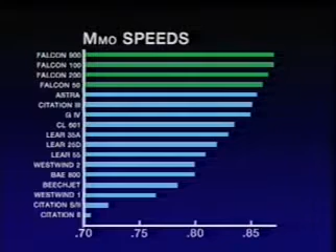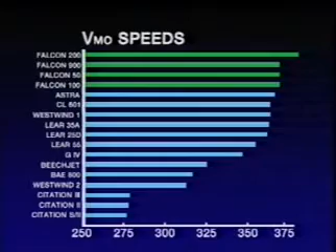This usually becomes limiting between 18 and 20,000 feet. The indicated airspeed limitation is expressed as VMO, velocity maximum operating. VMO is primarily a structural limitation. MMO is primarily an aerodynamic limitation.

To better understand Mach number, just imagine a sudden pressure disturbance in the atmosphere—a thunderclap, a gunshot, or a fast-moving aircraft. This pressure disturbance is transmitted by the collision of air molecules one against the other. The speed at which these molecular collisions propagate is the speed of sound.

Mach 1, or 100% of the speed of sound at sea level on a standard day, is 760 miles per hour, or about 660 knots true airspeed. Since the speed of sound decreases with temperature, it is lower at cruising altitudes than at sea level. Corporate jets typically fly at 50 to 80% of the speed of sound.

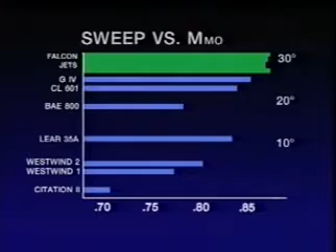An airplane's ability to cruise safely and efficiently at a given Mach number is largely a function of its wing design. Wing shape and the degree of wing sweep determine the most economical cruise Mach number. Given more sweep, a wing can provide even higher economical cruise speeds, although there is some penalty in range and runway requirements. Dassault has overcome the problem of increasing cruise speeds and Mach numbers without increasing wing sweep.

Instead, the computer-designed wing of the Falcon 100, for example, is optimized for high speed by reshaping to modify the wing's pressure pattern. This is similar to NASA's supercritical wing.

Computer-designed high-speed wings are relatively thick, which allows the installation of high-lift devices. They also have greater strength with lighter structure, while allowing economical cruise speeds equal to or greater than earlier thin-wing competitive designs. And they provide more room for fuel, so that external tanks are not needed.

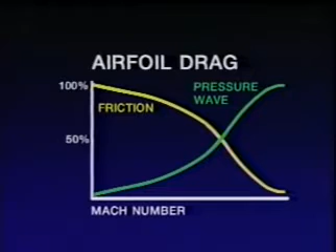At low Mach numbers, aerodynamic friction drag constitutes the major portion of airfoil drag. But as Mach number increases, a point is reached where the drag from the shock wave predominates. The reason for this is that as airspeed increases, the airflow accelerates until at some point the local Mach number on the wing's upper surface becomes sonic, or Mach 1. This is the wing's critical Mach number.

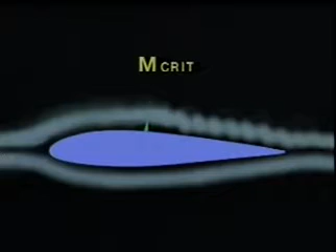If the critical Mach number is exceeded, an area of supersonic airflow is created, and a normal shock wave starts to form. With an increase in speed of only 5 to 10% beyond the critical Mach number, the shock wave is weak. However, a Mach number is reached eventually which produces a strong shock wave and a sharp increase in drag. This is called the drag divergence Mach number.

At this point, the shock wave is strong enough to alter the pressure distribution over the wing. This causes a decrease in lift and a change in the pitching moment as the wing's center of lift moves aft. The nose pitches down, causing speed to increase. This is the beginning of Mach tuck.

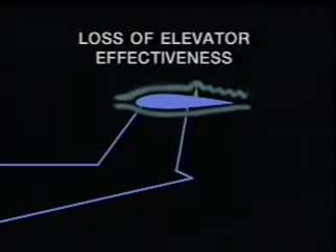Mach tuck involves two basic aerodynamic forces. First is the decreased effectiveness of the elevator caused by airflow separation due to shock wave formation. The second destabilizing force is the aft movement of the wing's center of lift as Mach number increases. This causes the aircraft to pitch down, increasing Mach number and aggravating the problem.

Left unchecked, the consequences are disastrous. When an aircraft exceeds its limiting Mach number, the turbulent wake behind the shock wave may cause a high-frequency buffeting in the flight control surfaces.

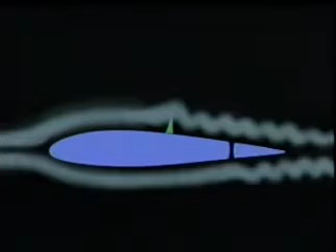With any type of reversible control system, the ailerons may bounce from stop to stop, a condition called aileron snatch. Prolonged or severe buffeting can result in structural damage or failure. In addition, separation of the boundary layer air by the shock wave results in decreased flight control effectiveness. In some instances, aileron control forces seem to reverse, and the elevator control force becomes extremely heavy.

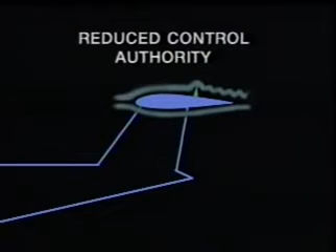So an accidental excursion over the limiting Mach number can result in control surface buzz, loss of normal control surface authority, and aggravated Mach tuck.

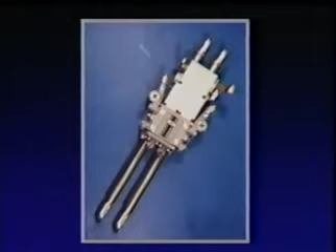In the Falcon jet family, these control problems are not noticed, thanks to an irreversible hydraulically actuated flight control system. The control surfaces are held rigid to prevent buzz or aerodynamic feedback to the pilot. The hazards of airflow separation are minimal in the Falcon jet family of business jets, with their swept wings, high-speed airfoil design, and hydraulically powered flight controls.

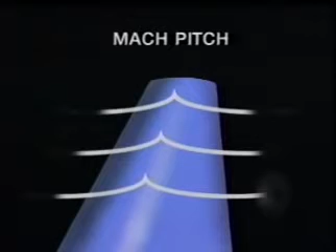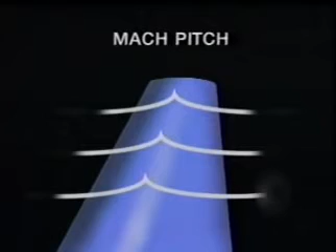Another phenomenon found in several types of corporate jets is Mach pitch. If the wing tips shock first, an aeroelastic twist rotates the tips and causes the center of pressure to move forward. In some aircraft, the wings shock unevenly, and a rolling moment is generated toward the wing that shocks first. A combination of these forces can result in Dutch roll, a rolling and yawing motion.

This can be corrected only by decelerating. Some aircraft require yaw dampers at higher altitudes. Dutch roll makes hand flying at high altitude extremely difficult in some aircraft.

By applying fighter technology, Falcon jets have none of these characteristics. They remain stable in pitch, yaw, and roll throughout their flight envelope. In fact, Falcons behave well not only to MMO, but 0.05 beyond. This is their MDF, or Mach demonstrated flight number.

An accidental Mach excursion can be caused by a change in aircraft attitude or a rapid change in atmospheric conditions. Increases of as much as 0.05 Mach have been known to occur in a matter of seconds. In many jets, this is a real emergency.

Above MMO, extension of spoilers often makes things worse. Reduction of speed may require landing gear extension and possible loss of the gear doors. Falcon pilots have more time to react to Mach excursions due to the extremely high MMO, higher than competitive aircraft. In addition, Falcon air brakes may be extended above MMO without destabilizing the aircraft.

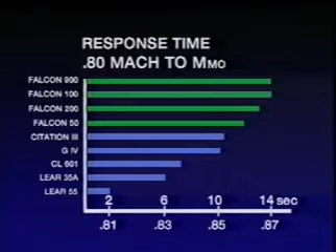What of the hazard called coffin corner? It's just not a problem in Falcon jets, but it can have serious consequences in several other types. Here's what happens. Every airfoil has an aerodynamic ceiling, where the high-speed and low-speed buffet boundaries merge. In that rarefied upper atmosphere, stall speed increases.

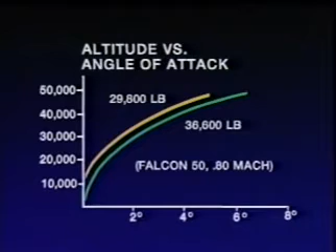This so-called low-speed buffet boundary is actually pre-stall buffet. It's caused by the combined effects of reduced air density and Reynolds number and the need to fly a higher angle of attack to maintain a target Mach number and altitude. In an effort to maintain a target Mach number of, let's say, 0.80, angle of attack must be increased, moving the stagnation point down the leading edge of the wing.

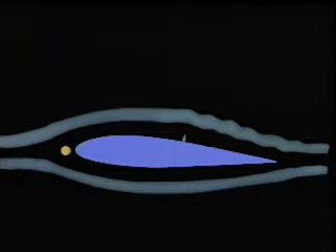Airflow over the top of the wing must accelerate as it has further to travel. The result is a higher local Mach number over the upper surface of the wing, generating a shock wave at a slower speed than at lower altitudes.

The onset of low-speed buffet is a direct function of aircraft gross weight, altitude, and temperature, coupled with bank angle and G-loading. The safety margin between low and high-speed buffet boundaries is best measured by indicated airspeed.

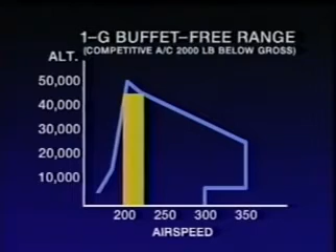For example, the 1G buffet-free range for a particular non-Falcon jet airplane at flight level 350 is from 187 knots indicated on the low-speed side to 279 knots on the high-speed side. At flight level 450, however, the buffet-free speed range is reduced by 77%, to 192 knots indicated on the low-speed side and 212 knots on the high-speed side, a spread of only 20 knots.

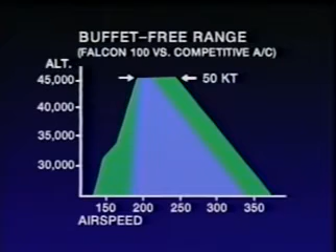This is not a problem in any of the Falcon jet aircraft. For example, the Falcon 100 still maintains a 50-knot spread between low-speed buffet and its .87 limiting Mach number at its maximum certified altitude of flight level 450.

The Falcon jet's exceptional high-altitude buffet-free envelope is superior to competitive models. We designed it that way. This means added safety during a clear air turbulence encounter or accidental thunderstorm penetration.

Now let's discuss turbulence penetration speeds. Aircraft manufacturers establish a turbulence penetration speed for each of their transport aircraft based on structural considerations. In competitive aircraft, this speed is often the same as maneuvering speed. At maneuvering speed, a sudden full-scale deflection of the elevator, rudder, or aileron will not result in structural damage or failure.

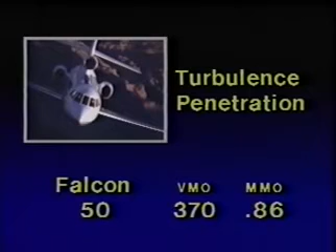The aircraft will stall rather than be overstressed by G-forces. In fact, under current certification standards, full rudder deflection at VMO must also be demonstrated. Falcon jet aircraft are so inherently strong that they are certified for flight through turbulence without speed restrictions. They can fly up to VMO or MMO as applicable. No other business jets have this capability.

The Falcon 100 has an established maneuvering speed of 220 knots indicated airspeed. At flight level 450, this is Mach .80. Competing designs are limited to Mach .73.

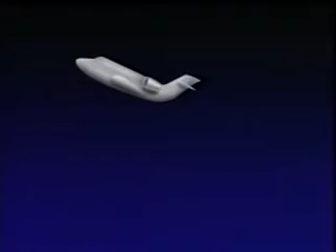At altitude, severe turbulence can quickly produce a gust-induced stall. In some T-tailed aircraft, this can lead to a locked-in deep stall. T-tailed aircraft with a locked-in deep stall problem are thus required to have an operational stick shaker and/or stick pusher system, which reduces this hazard. But a gust-induced stall is still possible.

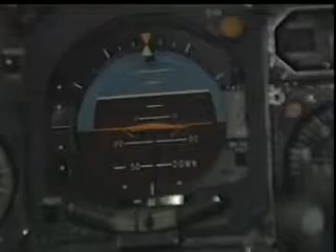With the autopilot on altitude hold, a sudden strong downdraft, mountain wave, or high-altitude wind shear can quickly place the aircraft below stick shaker airspeed, and control may be lost. Following a gust-induced stall, with the nose now lowered for recovery, suppose a strong updraft is encountered. The result will be a rapidly building airspeed and Mach number.

The instinctive pilot reaction is to trim and pull the nose up. But at high altitude, as little as half a G puts some aircraft into buffet, and the nose will not come up. Or, if the autopilot is flying the airplane, it will push the nose down in an effort to hold altitude. In either case, airspeed builds rapidly, and the limiting Mach number is quickly exceeded.

Without a Falcon-type irreversible servo control system, an accidental overspeed may expose the aircraft to the hazards of control surface buzz, aileron snatch, Mach tuck, and the loss of elevator control authority. Meanwhile, slowing down may put the aircraft into low-speed buffet. Such is the dilemma of Coffin Corner.

In the Falcon series, the irreversible hydraulic controls and aerodynamically advanced swept wings work together to eliminate these hazards. Some corporate accidents have occurred during dives at low altitude, where shock-induced flow separation is not a factor. In some instances, G limitations have been exceeded, and the tail or wing structure fails.

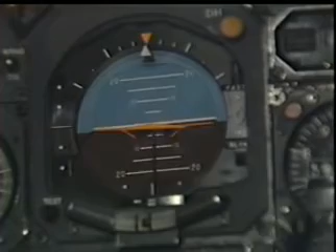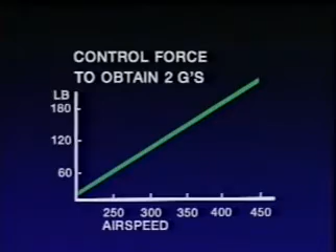In jets not equipped with servo controls, as indicated airspeed increases, the elevator control force required for dive recovery increases, and after the limiting airspeed is exceeded, the elevator may seem immovable. The hydraulically actuated flight controls used in the Falcon jet family of airplanes prevents this hazardous situation.

Because in a Falcon jet, as airspeed increases, the pilot continues to enjoy a comfortable elevator control force, while the mechanical advantage on the elevator becomes more restrictive to prevent sudden overstress by an overzealous control application.

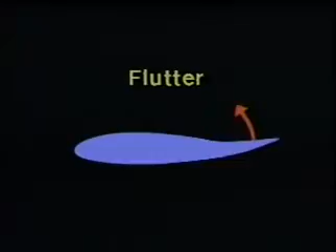Following a severe overspeed, evidence of aerodynamic flutter has been found in some jet upset accidents, but never in a Falcon. While any airfoil will flutter given enough airspeed, Falcons have been flown by test pilots in maximum speed dives to 445 knots indicated, or 75 knots faster than VMO, and studies show that flutter speed is far in excess of the dive speed.

Falcons are designed so that an accidental overspeed at high altitude will tend to be self-limiting due to shock-induced drag. Flutter speeds will not be reached. During a normal descent from cruise altitude, it is the same shock-wave-induced drag that caused Dassault to publish a fuel-efficient descent schedule of 0.8 Mach number intercepting 320 knots airspeed, avoiding excessive drag rise.

To make the Falcons even more comfortable and safe, Falcon engineered high-lift leading-edge devices and slotted Fowler flaps. These lower approach and landing speeds while retaining the docile flying qualities of a Falcon jet in cruise.

To increase the lift produced at low speeds, Dassault uses hydraulically operated full-span leading-edge slats. These slats change the wing's camber, producing greater lift at high angles of attack. The outboard slats improve airflow over the ailerons, improving low-speed handling. The inboard slats generate most of the lift by improving the airflow over the trailing edge flaps.

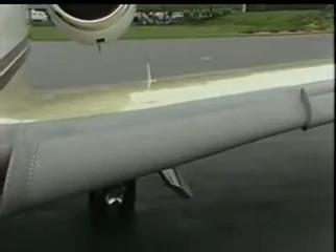The slats are extended and held rigidly in position by hydraulic actuators. Hydraulically operated slats have the advantage of remaining fixed in position during a landing approach in turbulent air. Aerodynamically operated slats on some aircraft can slide in and out in turbulence, constantly changing the coefficient of lift. When the slotted Fowler flaps extend, they increase the wing's chord as well as its camber, thus increasing the lift significantly in the first half of extension.

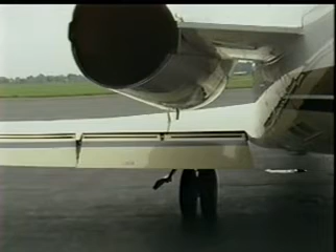When fully extended, high-lift devices lower the stall speed substantially and provide drag for a slow landing approach and touchdown. In fact, these high-lift devices are so effective that swept-wing Falcons routinely perform as well or better than straight-wing designs.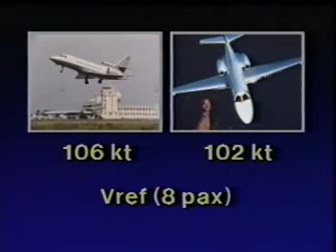For example, despite the fact that the Falcon 900 is approximately 3 times as heavy and nearly 100 knots faster than a Citation II, VREF with 8 passengers and NBAA IFR reserves is only 4 knots higher, and the runway it requires for a 1,500 nautical mile trip is actually less.

We've told you how well Falcons handle at high Mach numbers. Now we're going to show you by taking you into the cockpit of a Falcon 50 with Ed Allen of Falcon Jet Corporation and Hervé Le Prince Ringuet of Dassault. The demonstration you're about to see is unforgettable.

While this is not the recommended way to operate the aircraft, it provides dramatic evidence of the Falcon's superior capabilities in high Mach flight.

Today we would like to perform a high Mach demonstration for you. We're in our Falcon 50, but we could be in any Falcon, but not in just any business jet. This is due to the hydraulically powered flight controls, to the excellent aerodynamics of all the Dassault aircraft and all the Falcon aircraft. Hervé, could you block the airspace, please?

West control, Falcon Fox Bravo India November Romeo. Can you block an altitude for us between 430 and 310 heading to Sharp? Fox Bravo India November Romeo, descend for level 310, direct to Sharp. Thank you, direct to Sharp, down to 310.

The purpose of the high Mach demonstration is to show you that the Falcon 50 and all our other Falcons can fly at its limiting Mach and beyond without any problem.

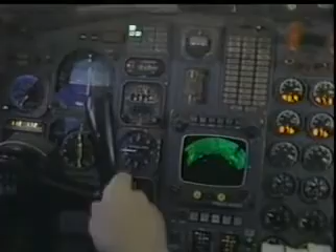So we'll go ahead and get started by first disconnecting the autopilot and the flight director and start a slight descent. The noise that you hear now is our trim clacker moving, which is a normal sound that you would hear in the cockpit.

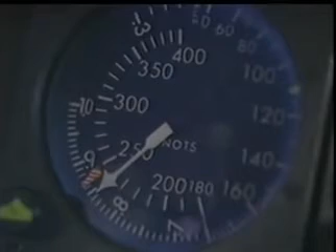Okay, our Mach has started to increase a little bit to Mach 0.83, 0.84, 0.85. There's our Mach warning limit at 0.865. We'll continue to accelerate. We're at Mach 0.90.

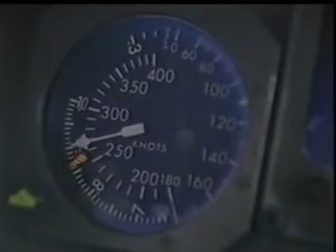And we still have no buzz, no vibration, and certainly no problem to fly the aircraft at this Mach. We can bank the aircraft left and right, 45 degrees of bank or more. You see there's still no tuck, there's no vibration to worry about whatsoever.

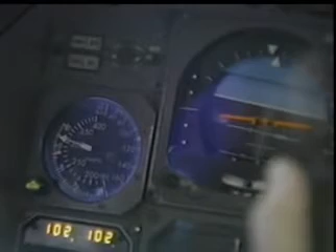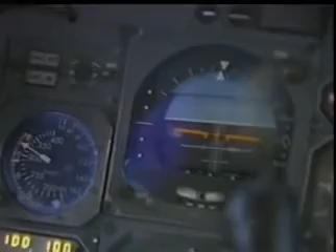We'll continue to accelerate, and now we're flying at 0.94, 0.95, 0.96, 0.97. We'll go ahead and trim hands off and see no problem, steady as a rock. Even our true airspeed now is 520 knots.

We can do a 2G pull-up. Even at 0.91 when we finish with the pull-up.

We can use our speed brakes to decelerate with no problem whatsoever. Here, if you take it, we'll decelerate now and get back to our normal cruise envelope. This just goes to confirm that the Falcons and all Dassault aircraft have a lot of inherent strength designed into them, and they have excellent handling characteristics. Thanks very much.

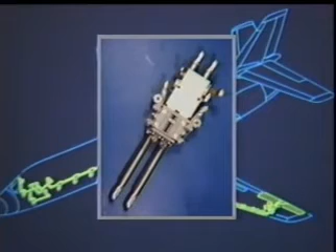Falcon conquers high-altitude, high-Mach flight through superior design. Irreversible, hydraulically actuated flight controls prevent undesirable aerodynamic feedback with solid controllability at all airspeeds and Mach numbers. Falcon pilots do not have to contend with Mach tuck, aileron buzz, or other dangerous characteristics.

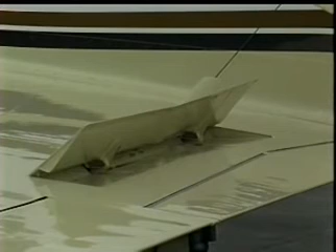In the event of an inadvertent Mach overspeed, air brakes may be extended without creating the instability commonly associated with spoiler extension in competitive aircraft. And the Falcon's wing design means no worries about coffin corner or turbulence upset at certified operating altitudes.

A Falcon jet does not require a stick shaker to warn of impending stall. No stick puller is required to prevent Mach tuck following an inadvertent overspeed. And there is no requirement for extraordinary pilot strength to recover from a high-speed dive.

To operate a Falcon jet at high altitude and in turbulent air, you don't require an autopilot or yaw dampers. In fact, all you need to fly a Falcon jet is the airframe and engines.

Falcons are engineered for safety throughout their operating envelope and beyond it as well. Their rugged structures, powerful control response, and superior aerodynamic design make them the only family of business jets that are totally at home in high Mach, high altitude flight.